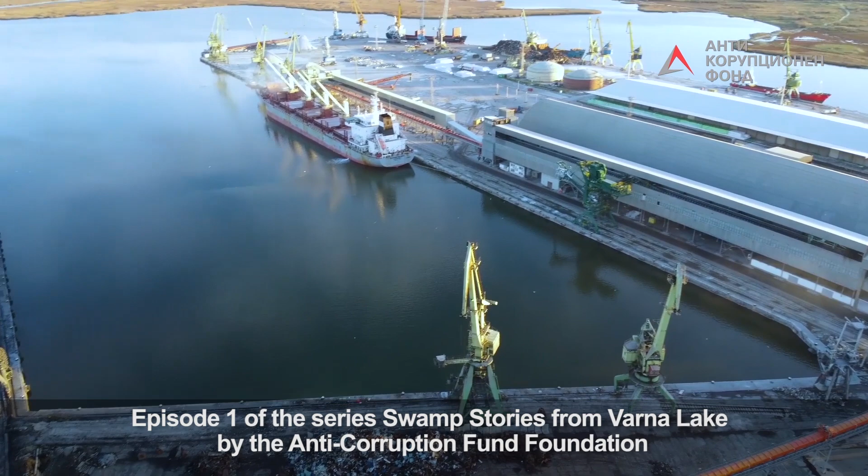Episode 1 of the series Swamp Stories from Varna Lake by the Anti-Corruption Fund Foundation showed the Bulgarian government signing contracts worth 435 million BGN for the deepening of Varna-West port.

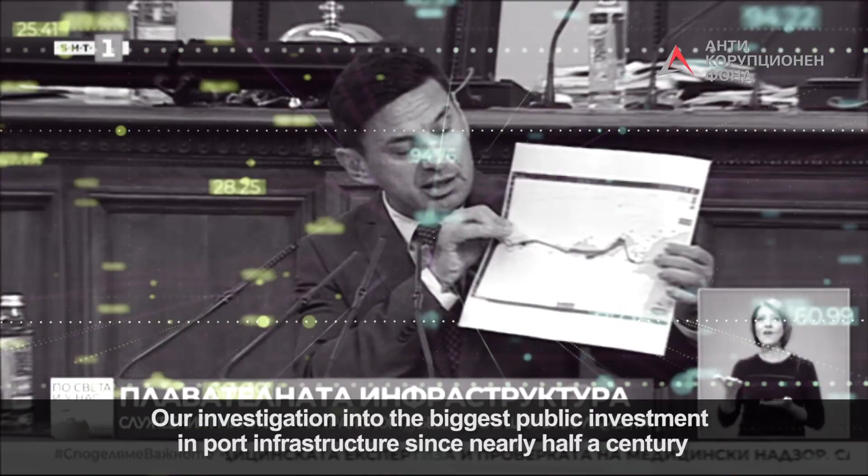Our investigation into the biggest public investment in port infrastructure in nearly half a century revealed numerous grave violations of the Public Procurement Act. Along the chain of illegal actions, officials paid more than 200 million BGN over the estimated market cost, in a manner clearly suggesting a corruption scheme.

All was done without a clear estimate of the economic benefits of the canal deepening, and without any idea of its final cost. Another unknown was whether large vessels would be able to enter Varna Lake and reach Varna-West, the largest publicly-owned port in Bulgaria.

Swamp Stories from Varna Lake, Part 2.

What are the serious technical challenges facing the plan to deepen the port? Let us hear from Spas Spasov, the journalist who first investigated this topic.

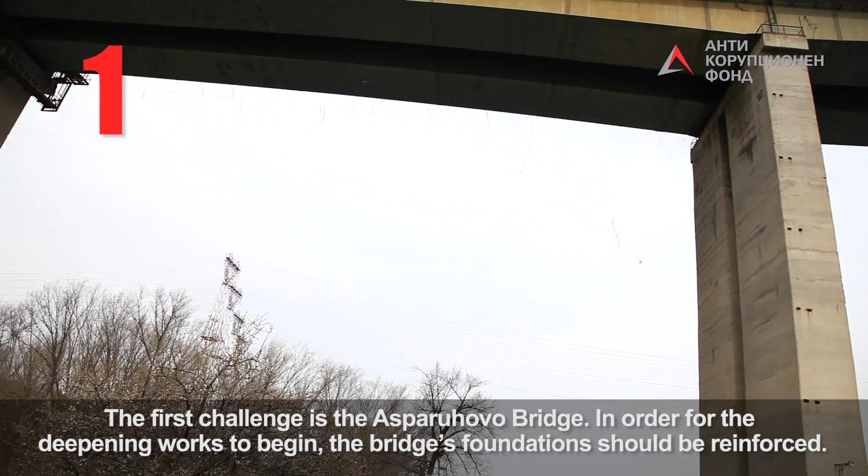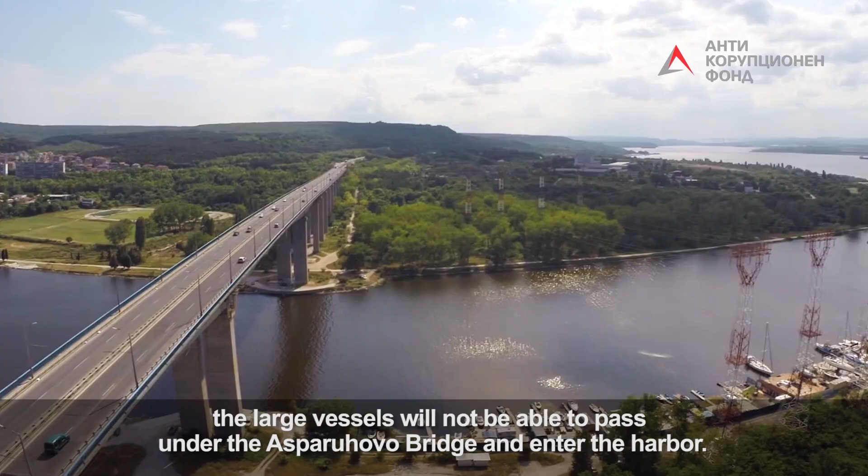The first challenge is the Asparuhovo Bridge. In order for the deepening works to begin, the bridge's foundations should be reinforced. This involves building concrete walls on both sides of the canal. If this is not executed successfully, large vessels will not be able to pass under the Asparuhovo Bridge and enter the harbour.

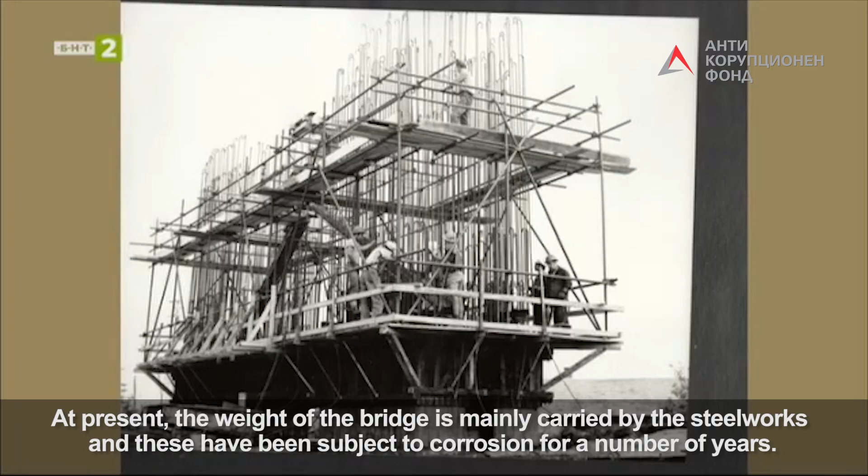Engineers and geologists say that the Asparuhovo Bridge has structural defects and that its concrete foundations are compromised. At present, the weight of the bridge is mainly carried by the steelworks, and these have been subject to corrosion for a number of years. The bridge is compromised, and the issue dates back to its construction.

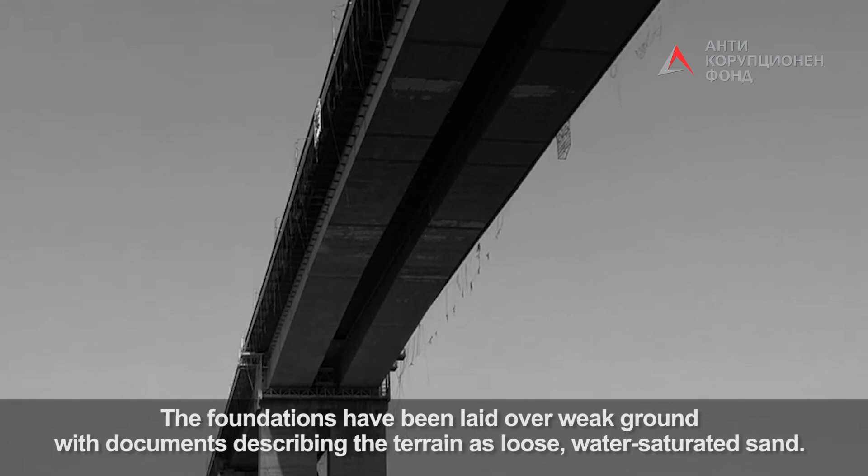The foundations have been laid over weak ground, with documents describing the terrain as loose, water-saturated sand. The bored piling technology used to construct the foundations relies on columns reaching solid ground.

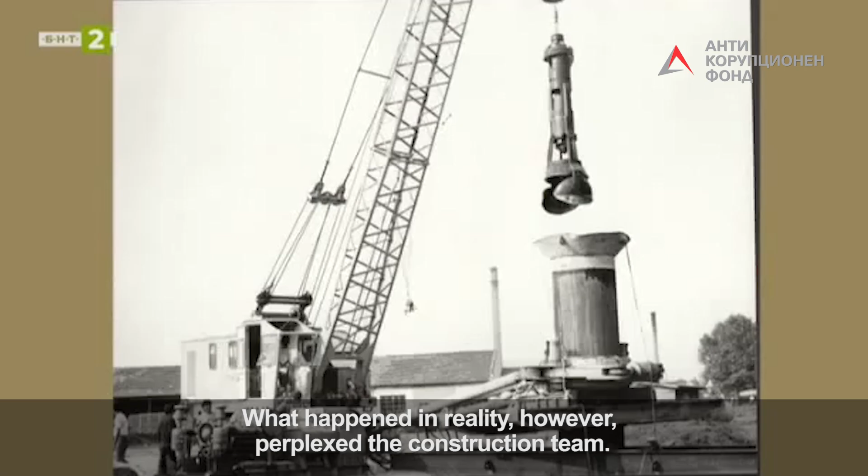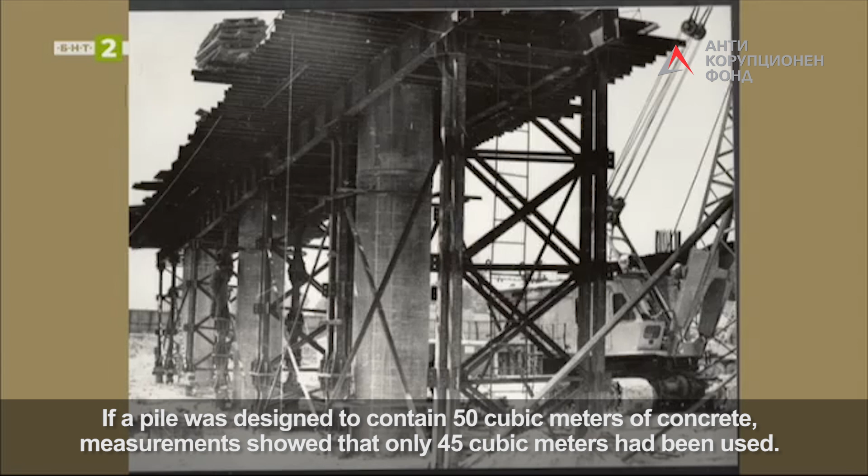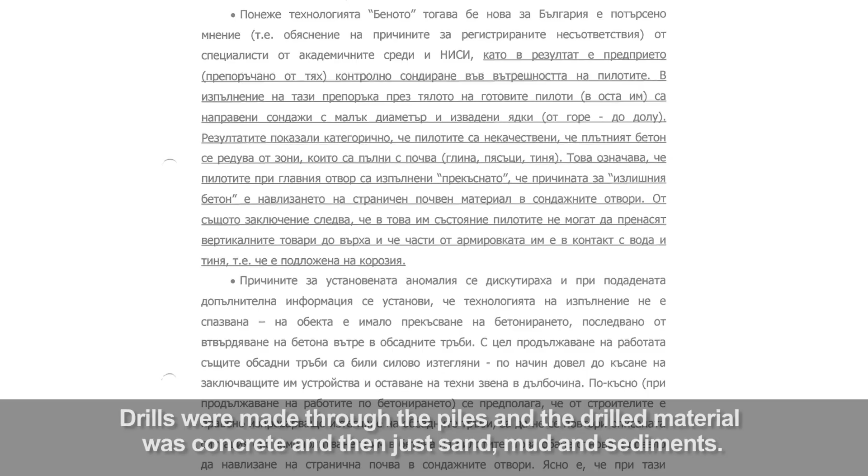What happened in reality, however, perplexed the construction team. If a pile was designed to contain 50 cubic meters of concrete, measurements showed that only 45 cubic meters had been used. This signified irregularities along the length of the pile. Drills were made through the piles, and the drilled material was concrete, and then just sand, mud and sediments. More than half of all the piles are compromised in this manner.

At a depth of 18 meters, the material coming out of the drill hole is still weak, wet concrete, 6 months after being poured, and it will never dry out.

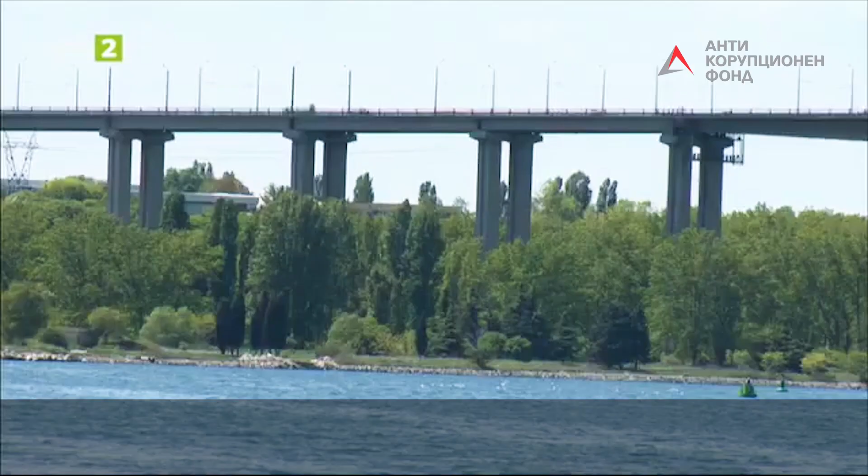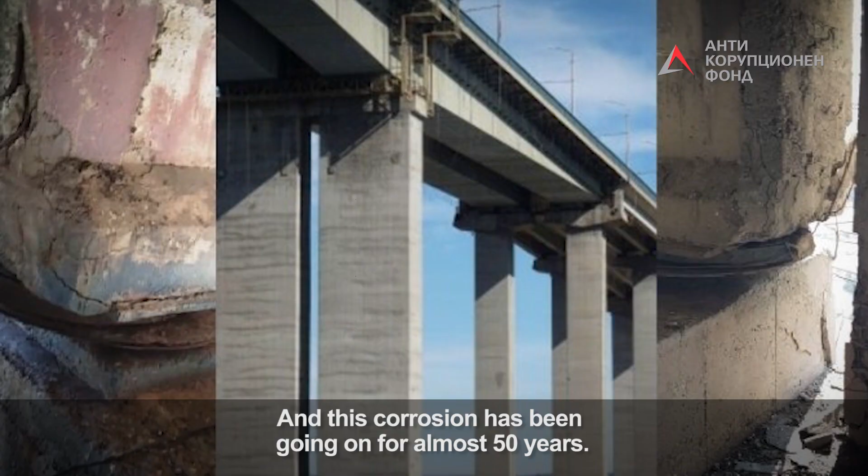Why are we raising this issue? The steelworks is subject to extensive corrosion at all the spots where it is in contact with water, and this corrosion has been going on for almost 50 years.

We are discussing this issue because the canal is about to be deepened, and this canal is located exactly under the main opening of the bridge.

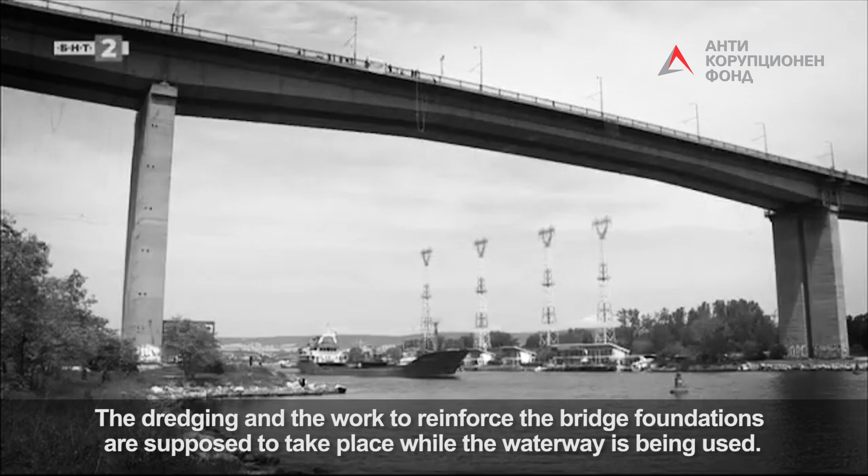The dredging and the work to reinforce the bridge foundations are supposed to take place while the waterway is being used. When a vessel passes through, waves literally crash the shore. But as the vessel continues on, the water moves back into the canal. Thus, the sand suspended in the upper layer of the water enters into the canal.

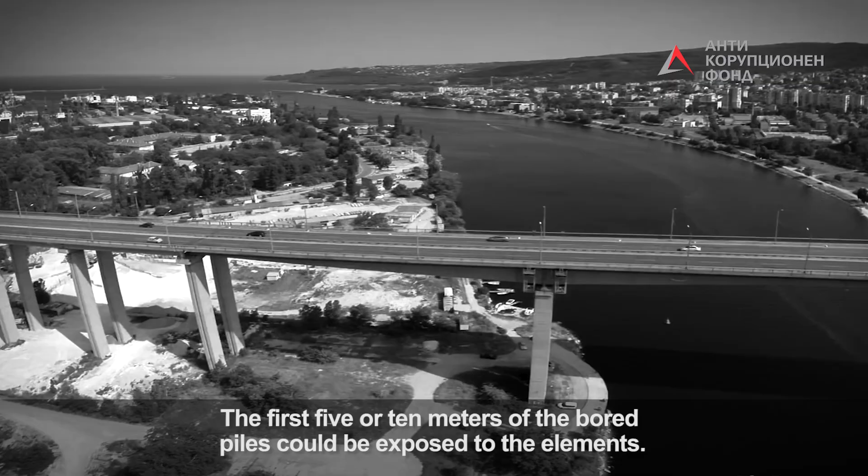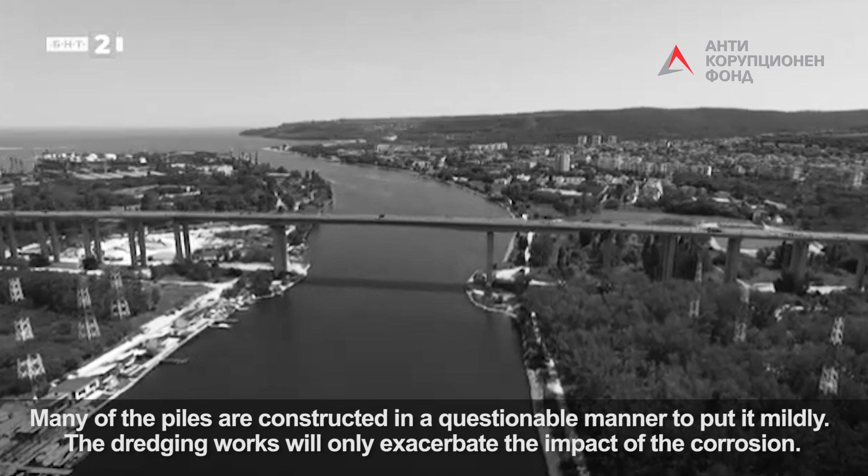This could lead to serious issues. What are they? The first 5 or 10 meters of the bored piles could be exposed to the elements. Many of the piles are constructed in a questionable manner, to put it mildly. The dredging works will only exacerbate the impact of the corrosion.

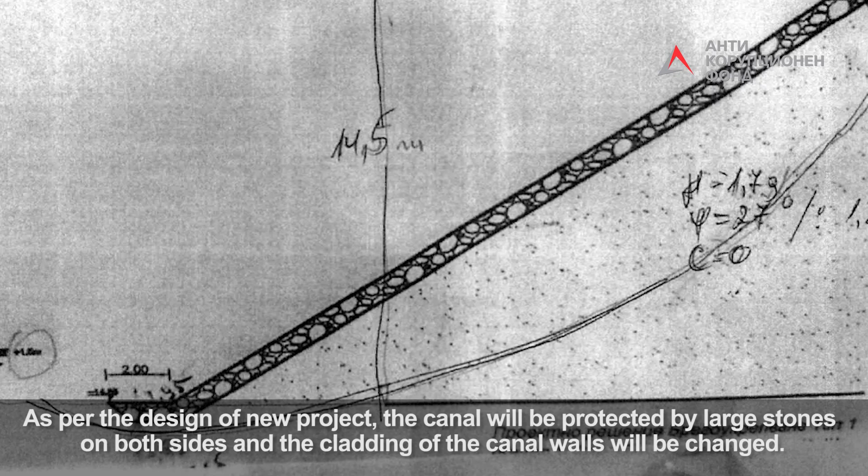As per the design of the new project, the canal will be protected by large stones on both sides, and the cladding of the canal walls will be changed. However, while the old cladding is removed, the walls will be left unprotected. This is the critical point in this project.

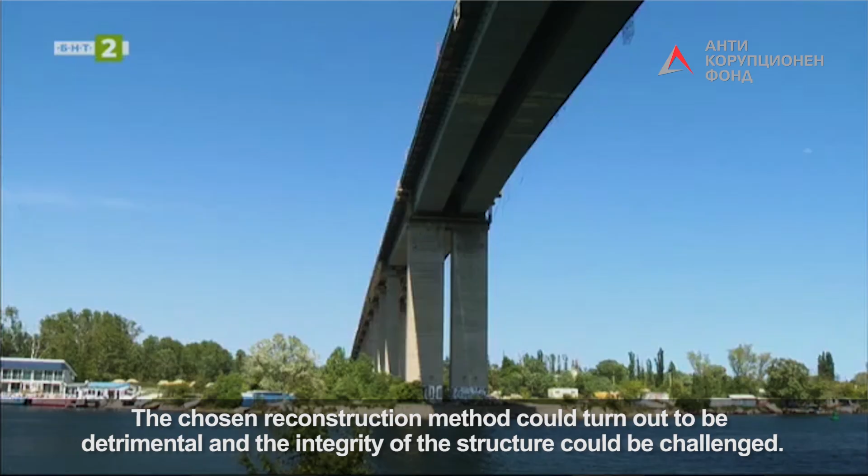The chosen reconstruction method could turn out to be detrimental, and the integrity of the structure could be challenged.

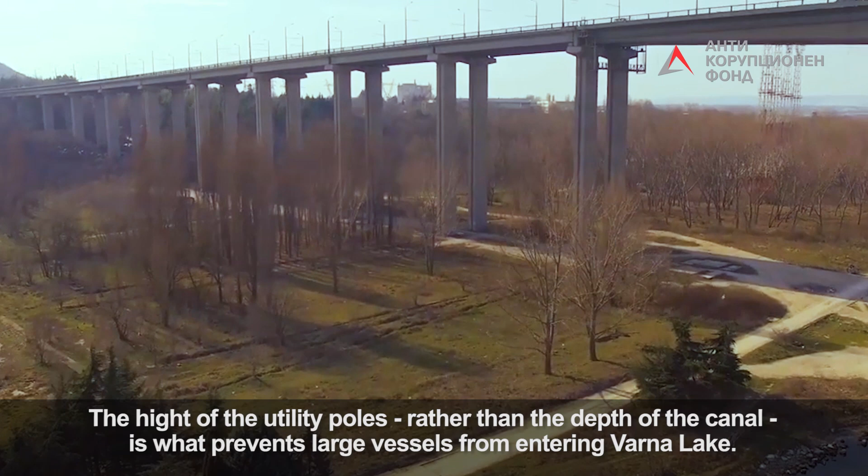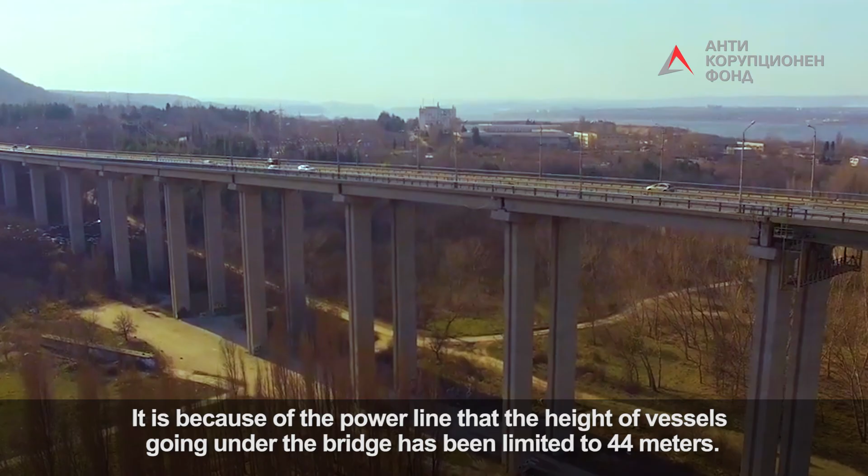Another issue in this area of the lake is the high-voltage power line which crosses the canal parallel to the bridge. The height of the utility poles, rather than the depth of the canal, is what prevents large vessels from entering Varna Lake. It is because of the power line that the height of vessels going under the bridge has been limited to 44 meters.

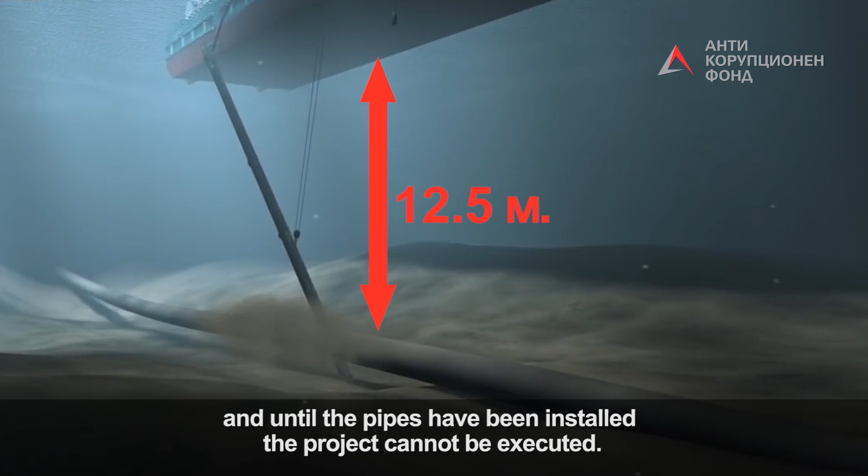At present, no construction permits have been issued for the laying of 4 multifunction pipes of the required size, and until the pipes have been installed, the project cannot be executed. Still, contracts have been signed, payments have been made, but it is not yet clear whether the power lines can be moved and how this is to be done.

According to Spasov, an additional challenge is the geology of Varna Lake. The bottom of the lake is rocky, and special equipment will be needed to dredge the spot under the bridge, increasing the depth from 12.5 to 14.5 meters.

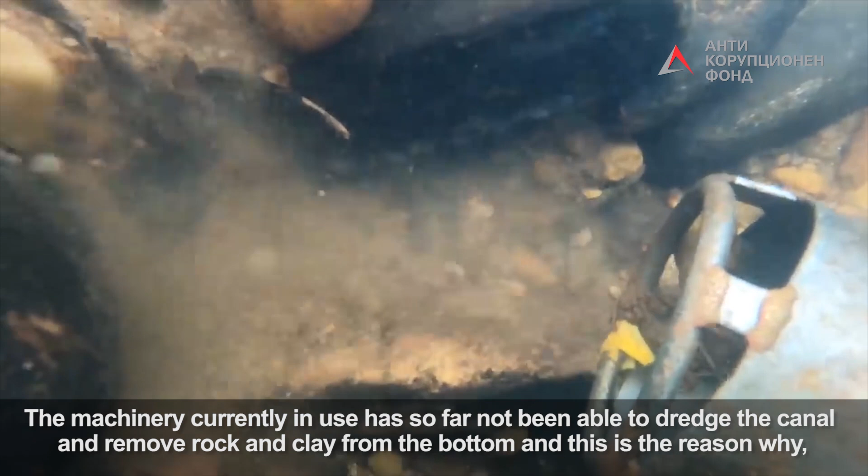The machinery currently in use has so far not been able to dredge the canal and remove rock and clay from the bottom. This is the reason why, upon entry into the canal, a vessel broke a sewage pipe running along the bottom, creating an ecological catastrophe and a massive spill of raw sewage into the waters of the lake. The geology of the bottom of the lake is one part of the problem.

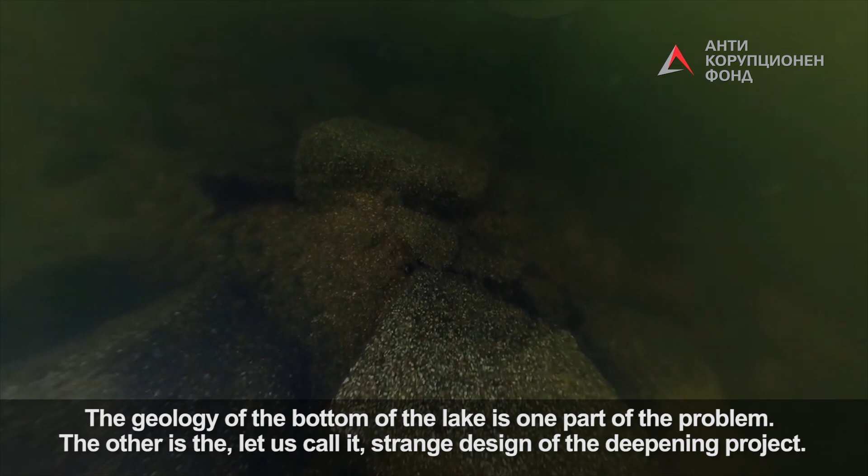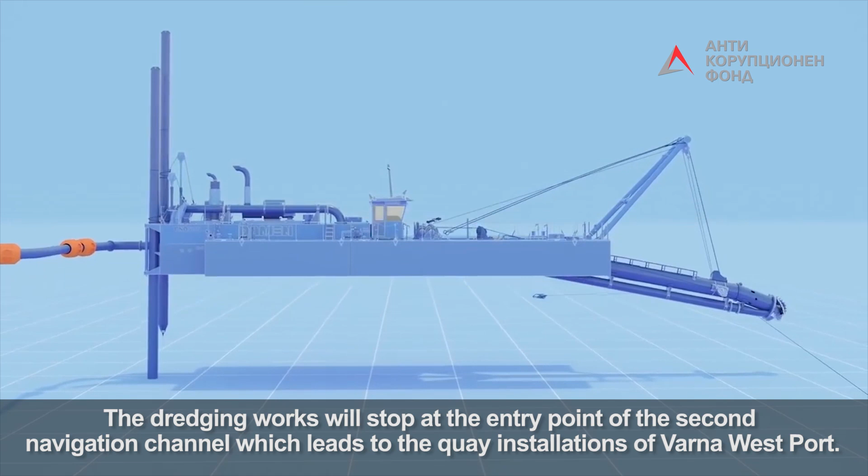The other is, let us call it, the strange design of the deepening project. According to the plan, the canal will be dredged, but not the quay installations of state-owned Varna-West port. The dredging works will stop at the entry point of the second navigation channel, which leads to the quay installations of Varna-West port. Suppose the plan is executed and the new depth of the canal is 14.5 meters.

A new problem arises: the quay installations at Varna-West are only 12 to 12.5 meters deep. This means that even if a large ship goes through the navigation channels, it will have no way to reach the quay installations at Varna-West.

An additional challenge, and one which has never been publicly discussed, is the fact that the quay installations at Varna-West port are sinking. They already handle considerable loads when large numbers of containers are offloaded and are unlikely to handle additional loads safely. For the quay installations to be able to handle additional loads, they first have to be stabilized and then deepened. Only then can the two navigation channels be used.

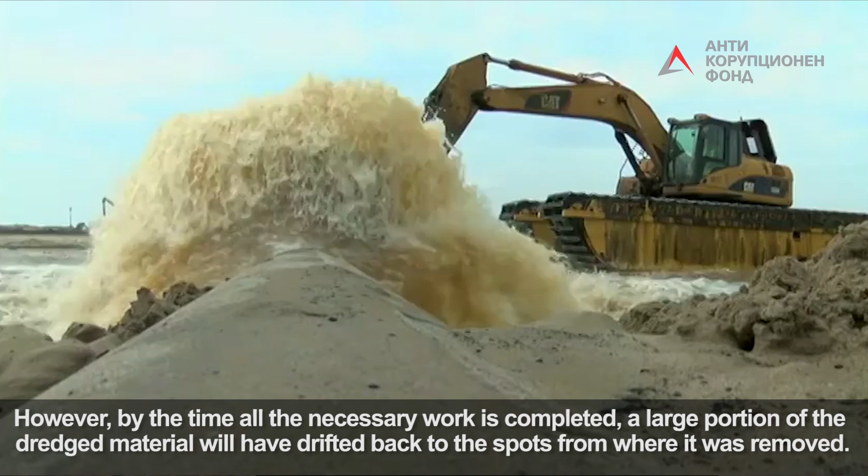However, by the time all the necessary work is completed, a large portion of the dredged material will have drifted back to the spots from where it was removed. And here comes another questionable aspect of the plan: the dredged material is deposited at a waste site within the lake, from where it flows back into the water.

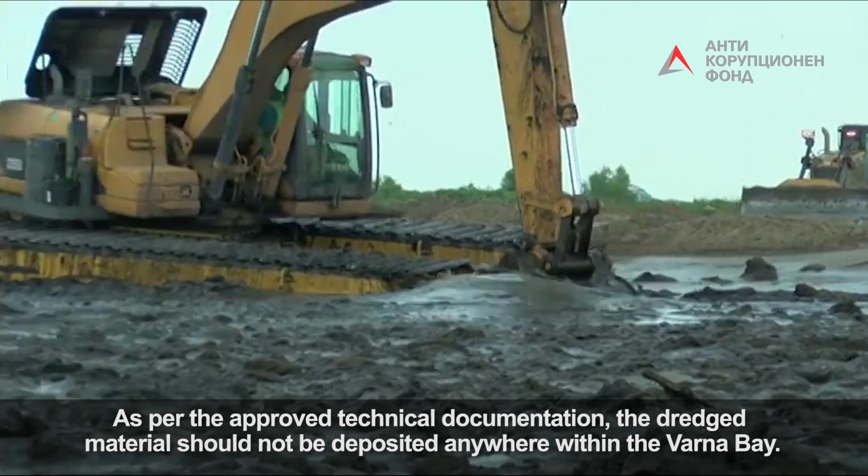As per the approved technical documentation, the dredged material should not be deposited anywhere within Varna Bay. In exceptional cases, the Nalbanka waste site, located within the lake, can be used, with a capacity of little more than 3 million cubic meters.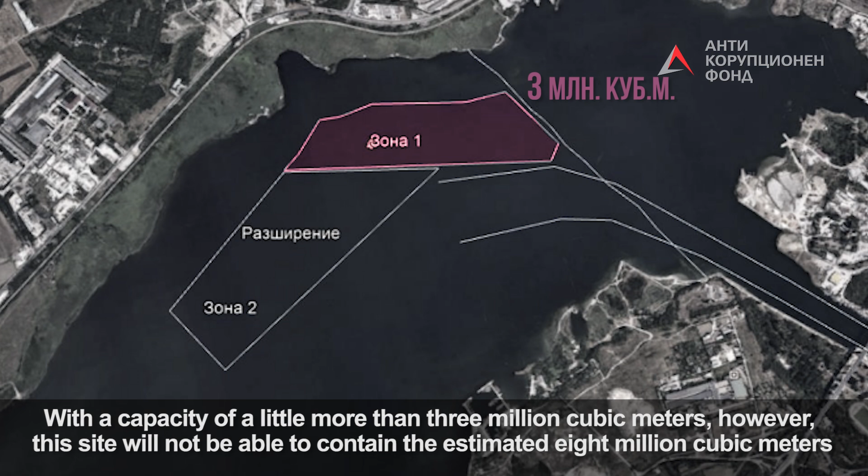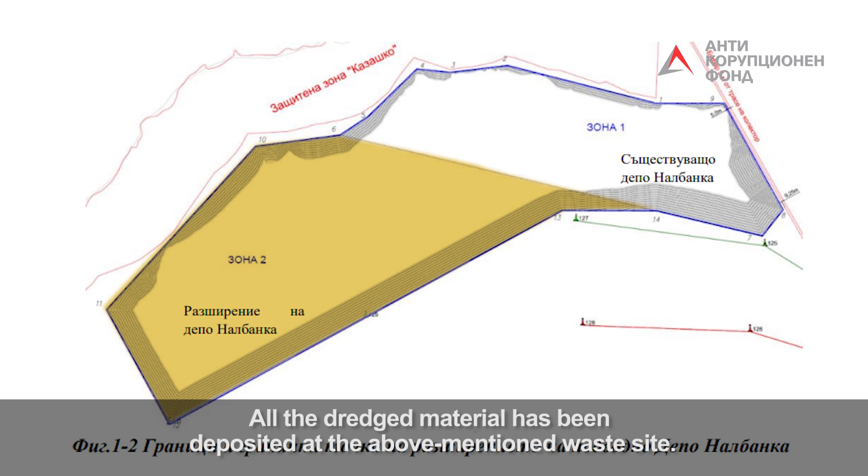However, this site will not be able to contain the estimated 8 million cubic meters which the dredging works are expected to generate. All the dredged material has been deposited at the above-mentioned waste site. It reached full capacity and had to be enlarged.

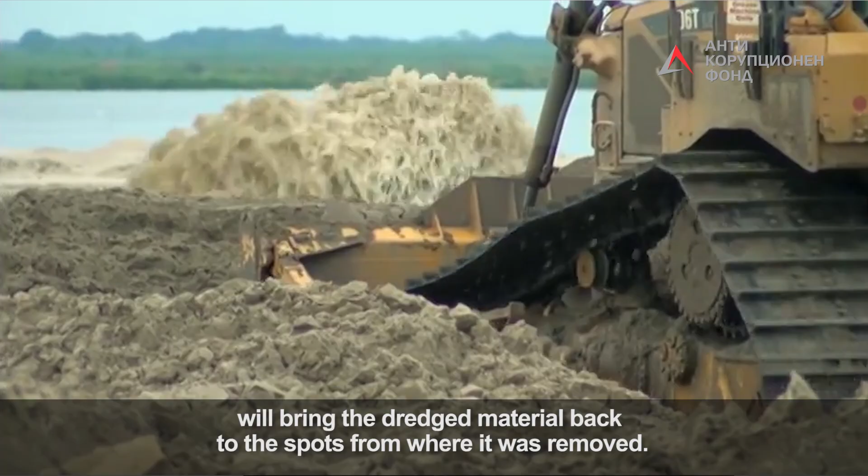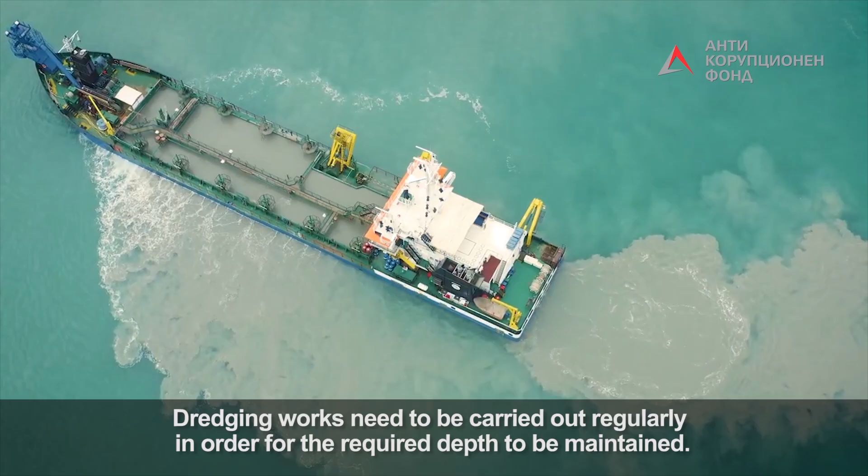Despite this enlargement, as time goes by, the currents and other natural processes will bring the dredged material back to the spots from where it was removed. Dredging works need to be carried out regularly in order for the required depth to be maintained. Therefore, until the next round of dredging works is carried out, large vessels will not be able to reach the navigation channels of Varna-West, the largest harbour in the lake.

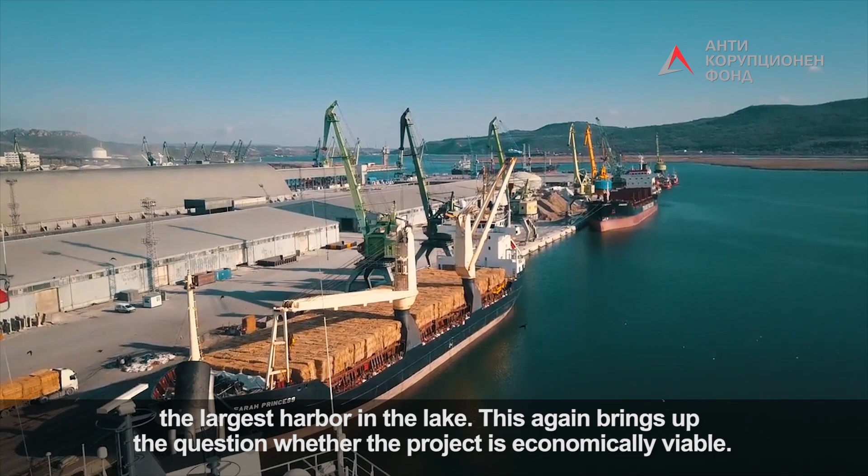This again brings up the question of whether the project is economically viable. Varna Lake and the adjacent Lake Beloslav both form a protected wetland, a fact which raises a separate issue: what is the impact of the dredging works on the ecological balance in the area?

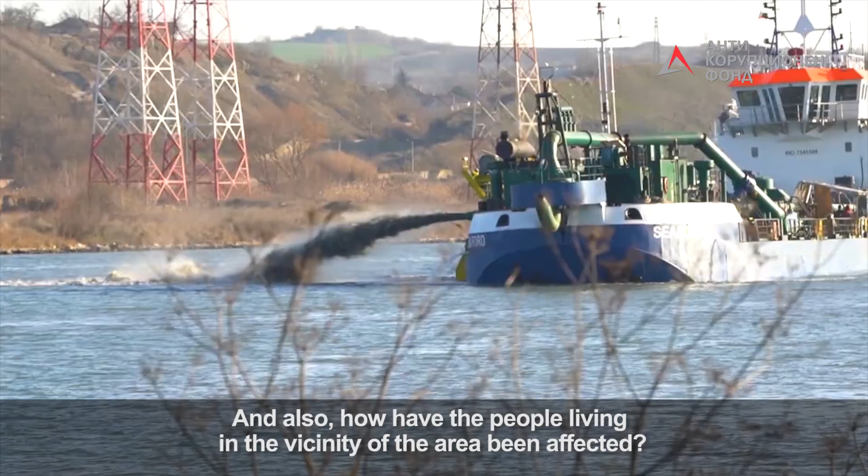What is the impact on the populations of native and migratory species that the sites are known for? And also, how have the people living in the vicinity of the area been affected? Has anybody tested the chemical composition of the dredged material? We know there are large amounts of pollutants in the lakes because of the chemical plants located nearby. In my opinion, another institution should be involved in this process.

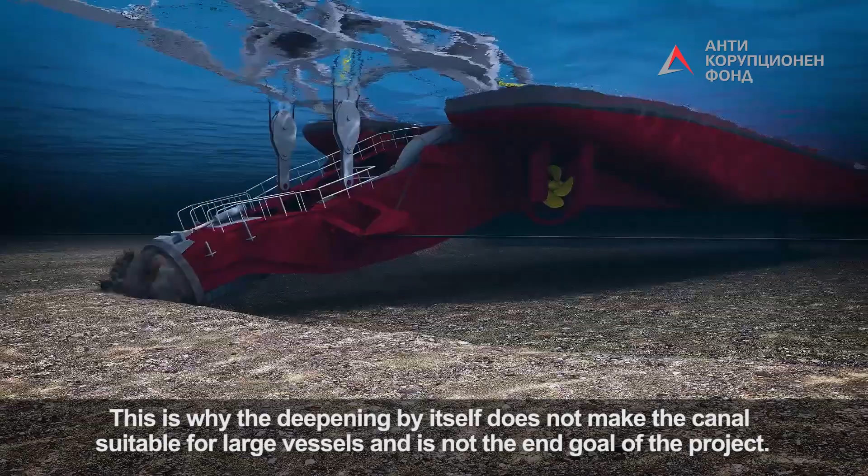Even if all the challenges above are successfully dealt with, there is a final one: lack of port infrastructure and comprehensive planning. This is why the deepening by itself does not make the canal suitable for large vessels and is not the end goal of the project.

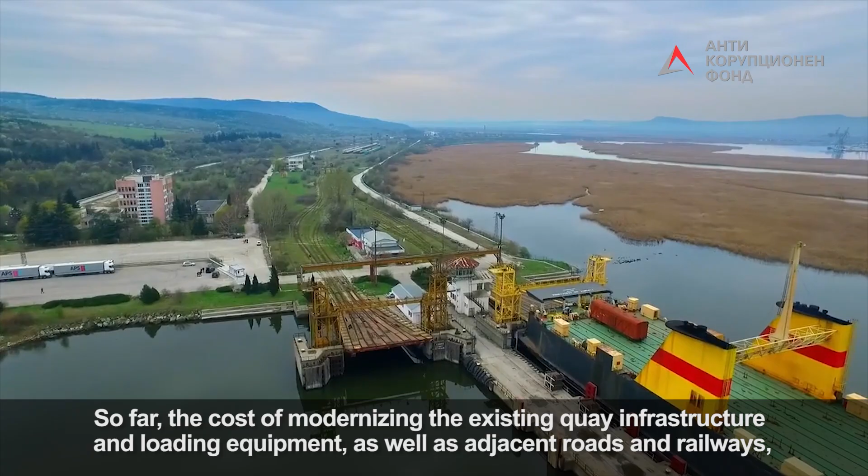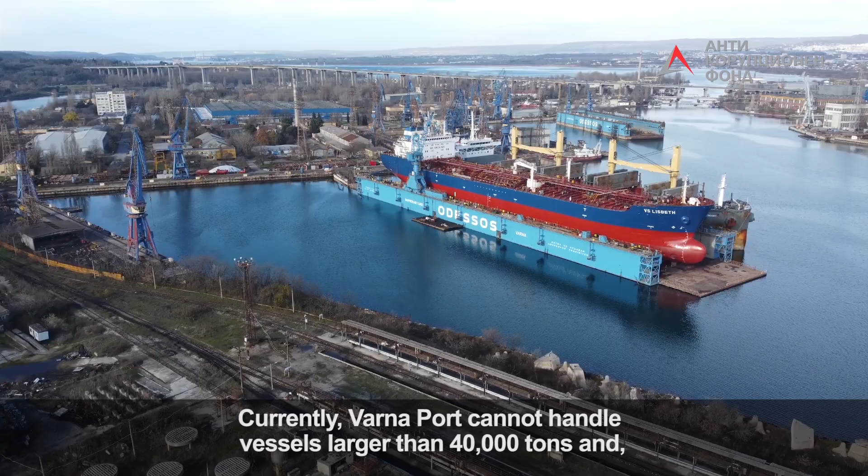So far, the cost of modernizing the existing quay infrastructure and loading equipment, as well as adjacent roads and railways, has not been calculated and has not been included in the investment plan. Currently, Varna Port cannot handle vessels larger than 40,000 tons, and anyway, vessels with loads above 30,000 tons enter the port very rarely, even though it is deep enough to handle them.

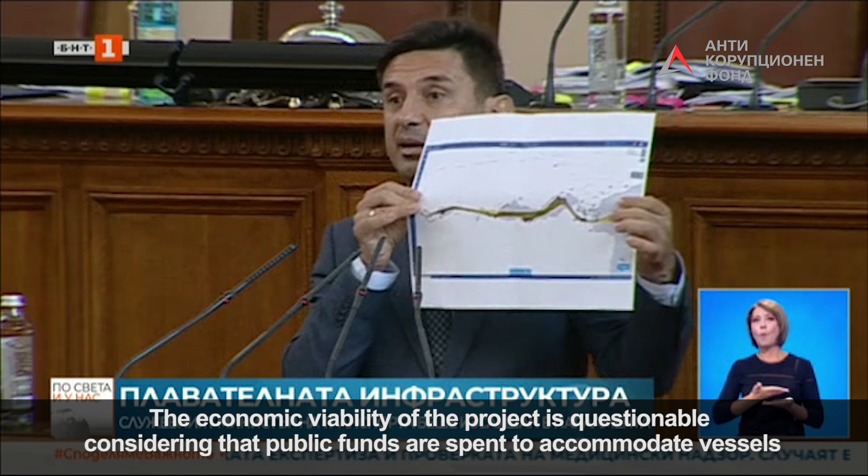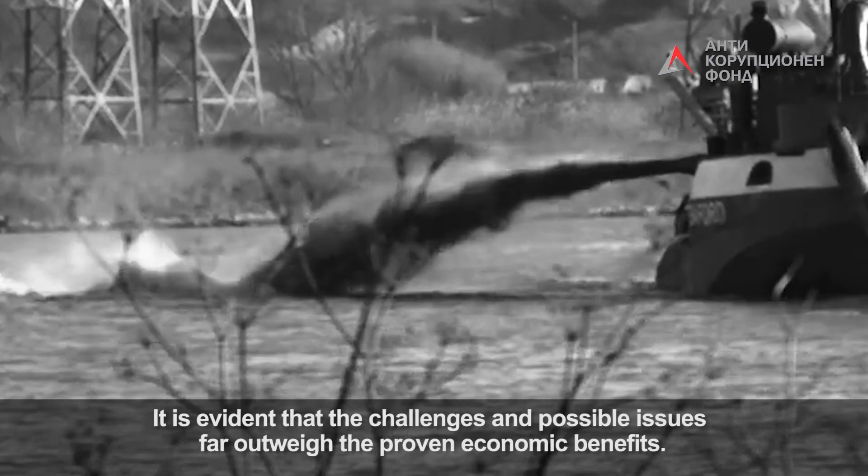The economic viability of the project is questionable, considering that public funds are spent to accommodate vessels which can at present already use the port but do not do so. Dealing with all the challenges listed above will cost an enormous amount of money, while the implementation timeframe is vague. It is evident that the challenges and possible issues far outweigh the proven economic benefits.

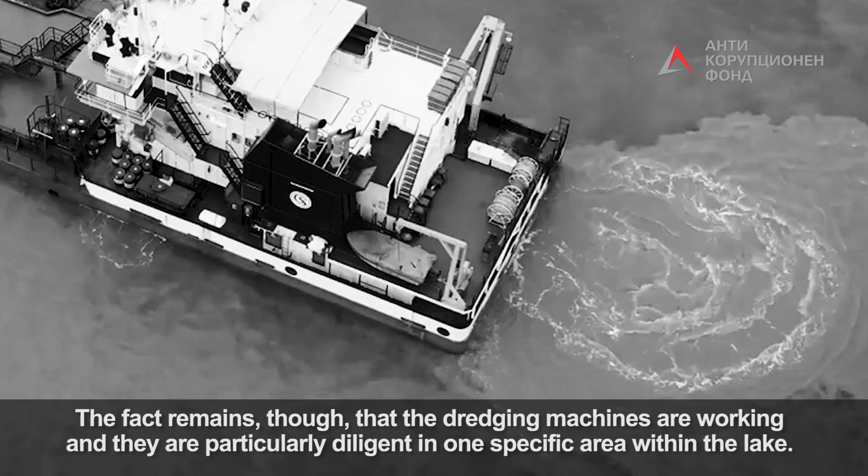The fact remains, though, that the dredging machines are working, and they are particularly diligent in one specific area within the lake. This points to the conclusion that maybe the project will bring benefits, but not for the parties publicly named by officials.